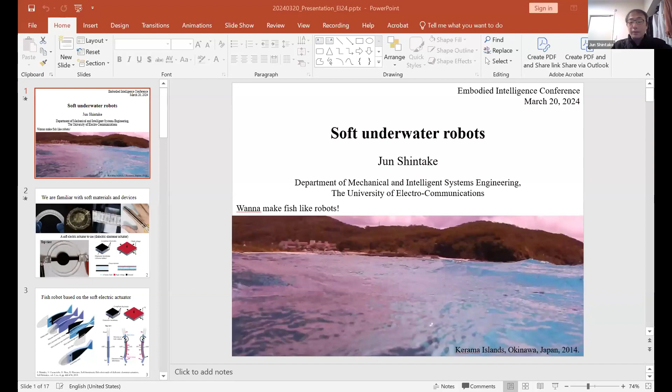Then we move to Jun Shintake. Do you think you can turn on your camera and perhaps you can share the screen? Yes. Just wait a moment, please. Right now I'm trying to share my screen. Okay, excellent. Good to see you. Just go to the full screen and you're ready to go. Do you see my screen right now? Yes, we can see, but can you go full screen? We don't see the full screen yet. Oh, I see. Maybe there's something wrong with my connection to the external monitor. Sorry for the delay. I'm trying to stop and restart my sharing. Just wait a moment, please. All right. Now, I'm hoping that you guys are watching full screen. Yeah, perfect. Please go ahead.

Okay. Thank you very much for giving this opportunity to share some of my work. So in this talk, I'd like to introduce some of our developments on soft underwater robots. The reason behind making those soft underwater robots is that basically I like fish. Now I'm showing you a video that I got 10 years back in Okinawa Island. It's a smaller island in the south part of Japan.

And as you can see underwater, we can see so many different creatures and they have diverse morphologies, and somehow they are all adapting to the water environment, which is totally different from where we are living now. This function of fish fascinates me a lot. And then at some point, I decided to duplicate those real fish by a robotic approach to understand how they generate swimming behaviors.

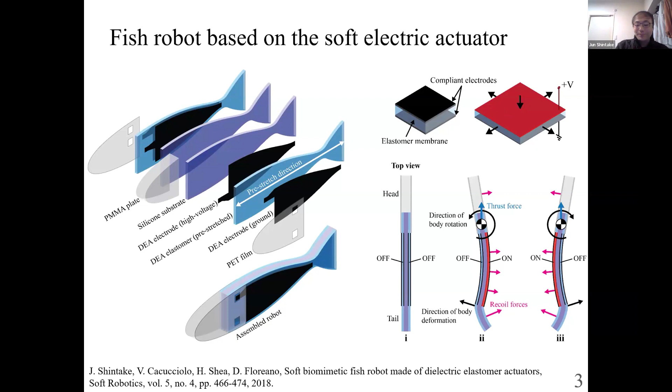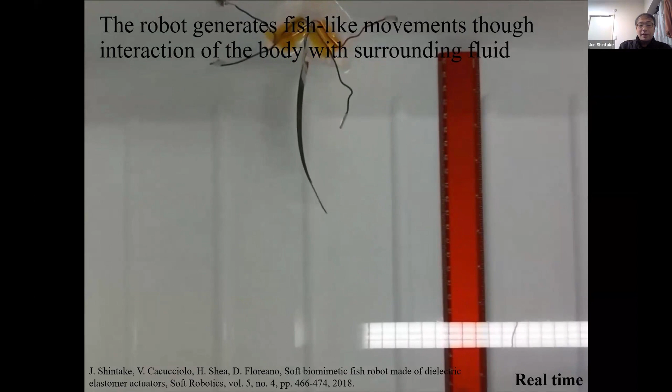This is what we got eventually. This is real time. As we can see, by activating the two actuators one by one, eventually the robot showed nice fish-like deformation and kind of efficient swimming movement. Which is surprising, because what we are applying is just on and off of the voltage, but somehow we are able to realize fish-like motion.

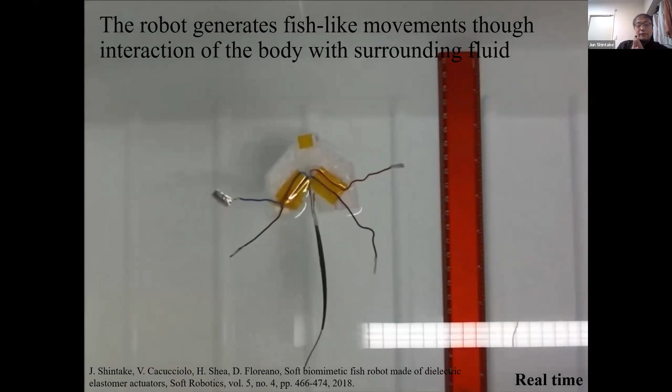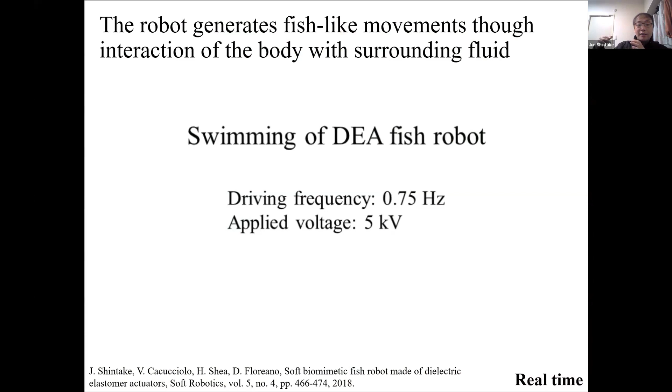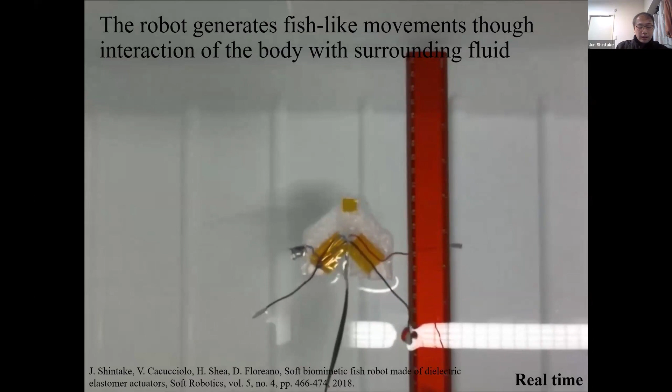At the time I got this result, I thought that somehow a soft body can interact with external environments to create a kind of efficient deformation in water such that it can push itself forward. That's why we get this kind of nice swimming motion. This made me develop underwater robots having a kind of passive body.

Then we went to making this kind of complicated fish-like robot. What we have is a structure mimicking bone and muscle of real fish. And then the fore part is moved by a servomotor located here.

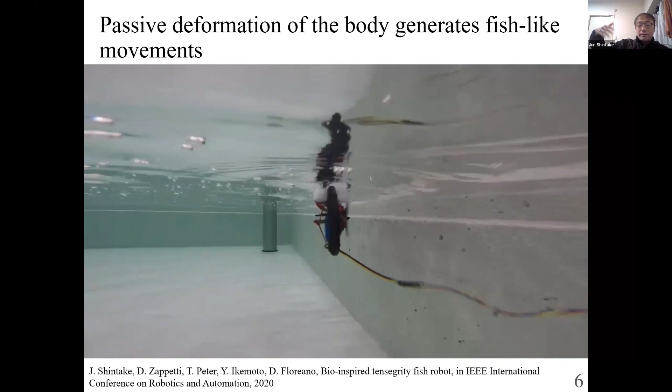All right. And then this shows a test of the robot. This time, the body of the fish robot is completely passive, but as you can see, in the end, we get nice deformation, fish-like deformation. And then this robot swims pretty well somehow. For me, this is kind of intelligence already implemented in the body.

And then after this study, we decided to extend this concept, oscillating a passive soft body by motor. So this is what I got after. So now we have a flexible body connected to a brushless motor, which is quite powerful, moving the body like this. And then this motor is controlled by microcontrollers and receivers, meaning that basically we can control this robot remotely.

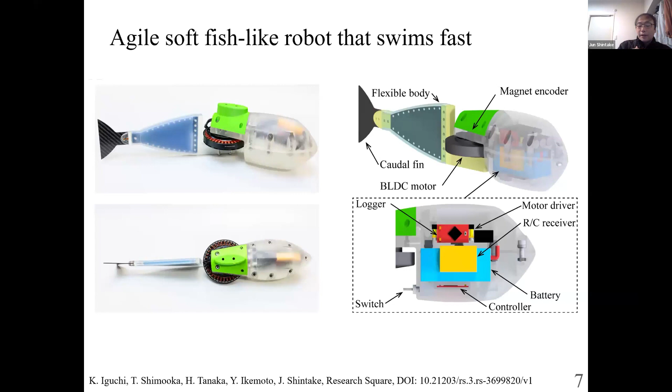Then we made this architecture because at some point we realized that by using a powerful motor, we could generate very agile robotic movement. Okay, so this is a video moving the body by a motor. So you can see that by oscillating the flexible body, which is actually a little bit rigid, it can bend like a fish body.

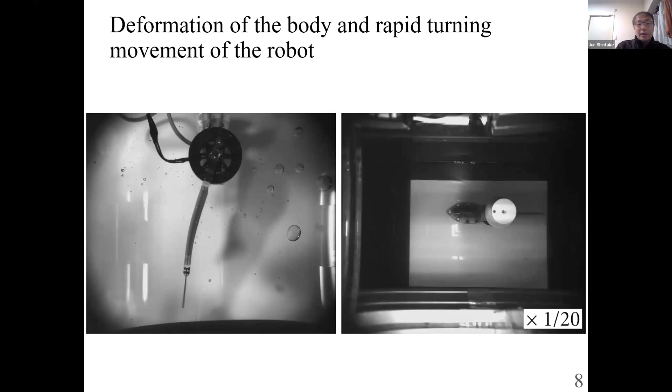And then, now I'm playing the video on the right side showing turning of the robot. This is real time. So by having a body directly connected to a motor, it's possible to realize quite fast turning motion. Because it's pretty fast, we cannot recognize the movement. So this is slow motion. And then you can see that the flexible body of the robot is functioning very well to balance the attitude of the robot.

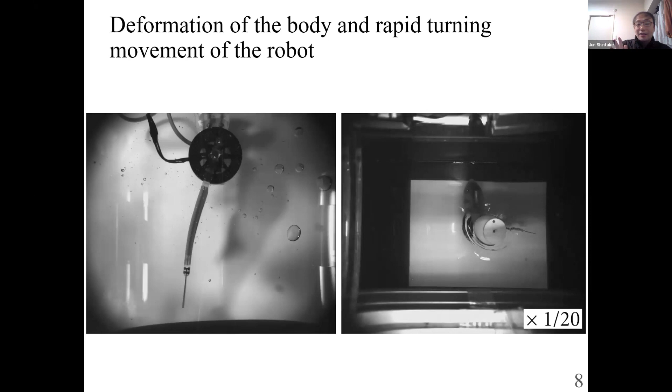Okay, then after that, we went to a swimming experiment in a water pool. So now we are putting the robot in the pool like this, and then we start the motor. And we saw that the robot was able to swim very fast, like this. I think there's another scene watching outside. Okay, that's all like this. For me, this is a good achievement.

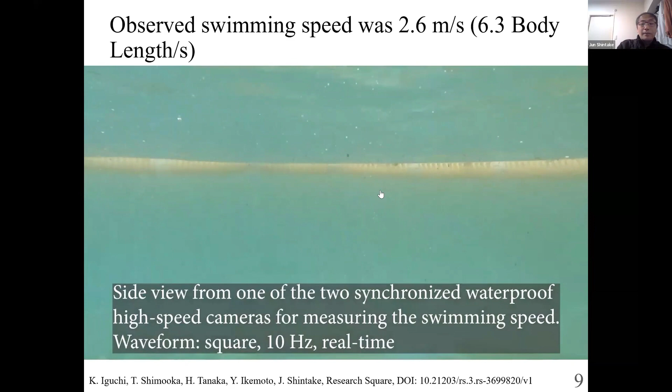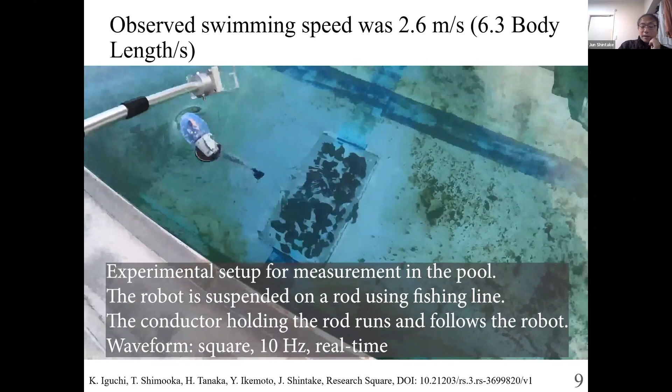I mean, by combining rigid motor and soft body, basically, it's possible to have agile soft underwater robots, which are comparable to real fish. So on the top side of this slide, you can see the speed of the robot, which was more than 6 body lengths per second, which is comparable to real fish, as well as faster than most robotic fish.

Okay, all right, and then finally, I'd like to share with you some interesting robot. So this is to exploit interaction between liquid and liquid. The idea resulted from the fact that oil and water do not mix with each other, meaning that there is an interface between two different liquids. And then by moving one of those liquids, basically we can make a reaction force to move a robot.

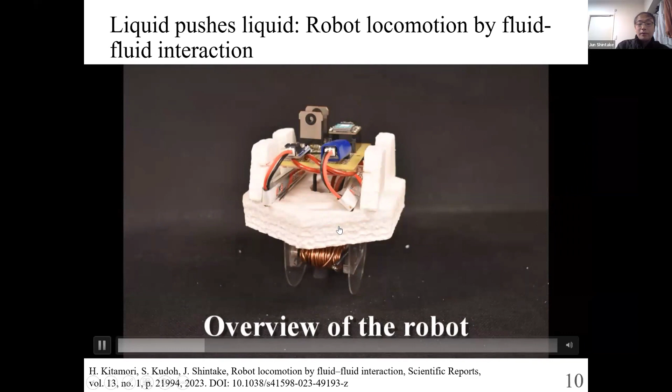Then we demonstrated this concept by using ferrofluid. So this is the movement of the ferrofluid in water. The main component of ferrofluid is oil. That's why it can hold its shape. And then by having external electromagnets, we can deform the shape of the ferrofluid to make reaction force to the surrounding environment, which is in this case water.

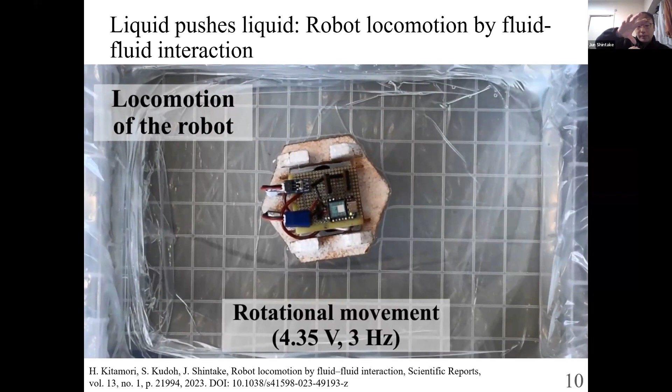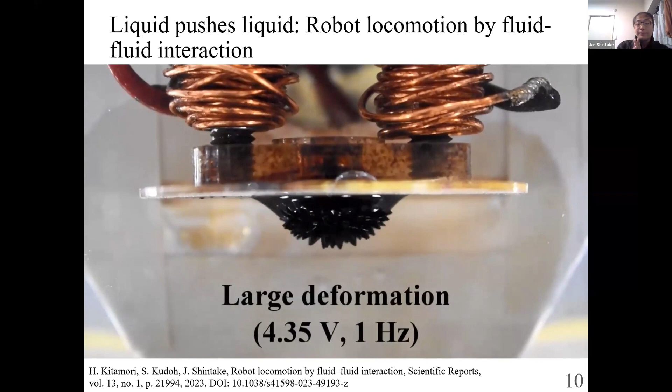And now we are watching the robot, and as you can see, the robot can move forward. And also, we found that by changing the activation of this ferrofluid, it's possible to make rotation of the system. This happens by the interaction between liquid and liquid. This is kind of a new concept of a soft robot.

All right, let me summarize my talk. I want to say that basically soft underwater robots are a very interesting platform to study embodied intelligence. And this time, I'd like to have your opinion on whether those underwater robots could be useful for your study of embodied intelligence.